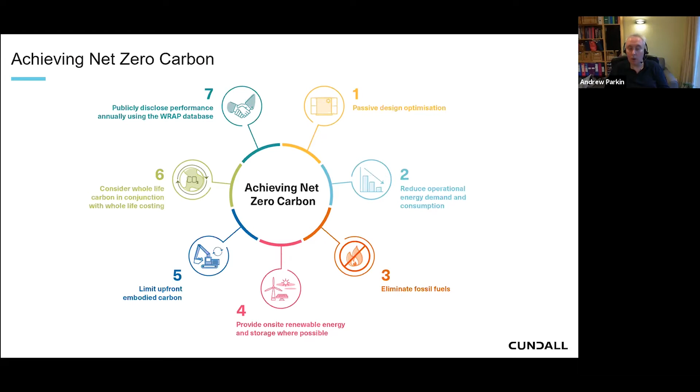This is something we feel very passionately about. We don't see there's any other choice - we have to aim for net zero carbon in everything that we do, and we're pleased that we can lead the way in that. We would urge you all to go the same way, and if you need any assistance in how you or your clients or your building stock can achieve net zero carbon, then please get in touch with us.

We're very proud of the work that we do. We win lots of awards for all different things, not just environmental, but for building design and everything. We're very proud of what we do, and we take a lot of opportunity to celebrate with our clients and staff the difference that we can make in the built environment.

We operate across a number of sectors and services, and the particular ones we're going to be dealing with today are air quality, acoustics and noise, and transportation. But all the other ones here come into play, and we work with our colleagues. The reason we're doing this seminar as a joined up approach is because that's how we do things.

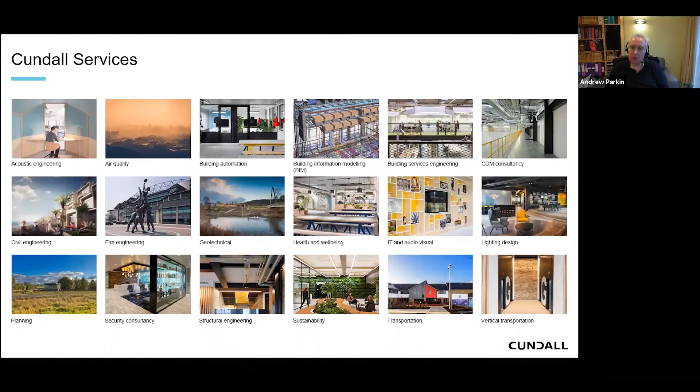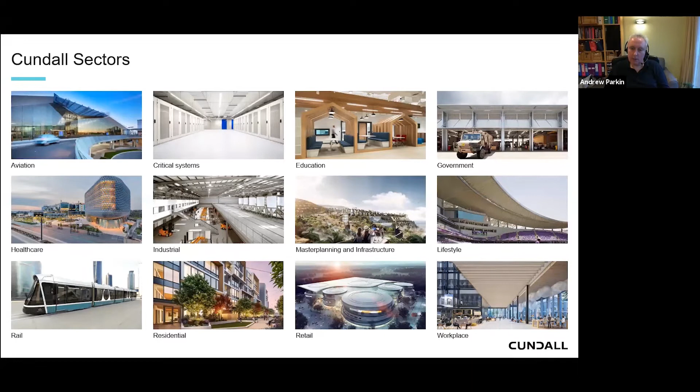Clean air zones are not just about air quality, they're not just about transportation - they're about everything. One of the key things is that there are consequences and knock-on effects for everything and everyone that we work with. Generally, clean air zones tend to be in city centres, and therefore most of these sectors will come into play.

So I'm going to hand you over to Jenny, who's going to talk to us about what clean air zones are. Jenny. Thank you, Andy.

Why clean air zones? It's well known that poor air quality has a significant effect on public health, both in the long term and the short term.

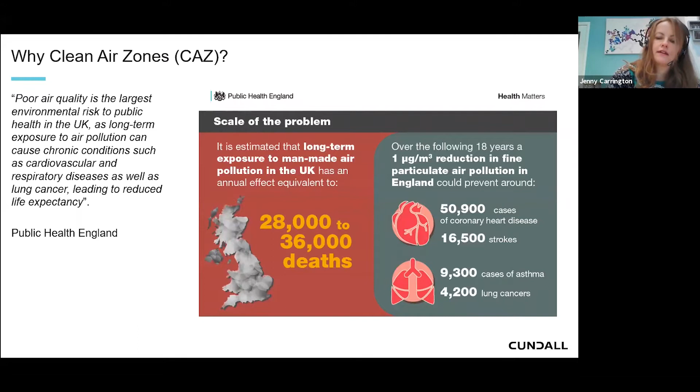So why clean air zones? Air pollution comes from a number of different sources. As well as transport emissions and road transport and non-transport, there's also industry, agriculture, residential and commercial small-scale combustion. But for road transport, DEFRA has estimated that about 80% of NOx emissions come from road transport, with the largest source being diesel light-duty vehicles and cars. So to enable compliance with the nitrogen dioxide objective, a clean air zone could be an appropriate way to go, based on the results of modelling for the UK's Air Quality Action Plan.

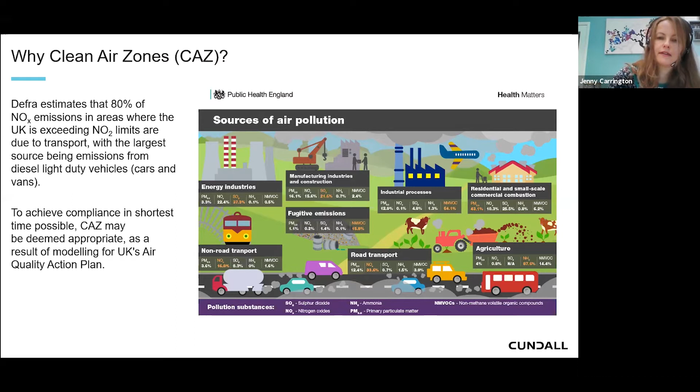So what is a clean air zone? It's an area where targeted action is taken to improve air quality by discouraging the most polluting vehicles from entering the zone, aiming to reduce air pollution associated with road transport, such as nitrogen dioxide and particulate matter. There are different types of clean air zone: non-charging clean air zones, which could be pedestrianised zones restricting vehicles, or allowing vehicles in but with a charging structure. There are 4 different classes, A, B, C and D, with each having an additional scale, D being all-encompassing. The cars included there would be Euro 6 diesel and Euro 4 petrol or lower. Another term for a charging clean air zone is a low emission zone.

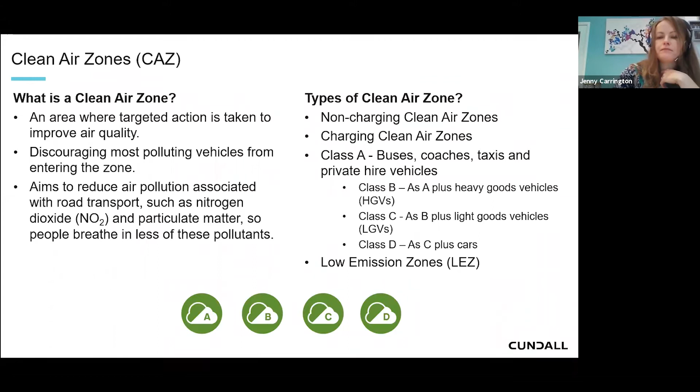So how are we getting on with clean air zone implementation? There has been somewhat of a delay with COVID, and some of the dates have been postponed or are still up in the air. York is proposed to be the first to go ahead in January next year, and it's going to be the first voluntary clean air zone in the country. This includes a request for funding for zero carbon vehicle delivery, including the use of rickshaws, which I think is a great additional level of innovation there. I know they've been in use in Edinburgh for quite a while.

The ultra low emission zone in London is due to expand sometime in 2021 to the north and south, and Birmingham, Bath and Greater Manchester already have confirmed dates, but the dates for Newcastle, Gateshead and Sheffield are still up for confirmation. There are other cities where a clean air zone is still to be considered further, based on feasibility studies to determine whether this clean air zone would actually be appropriate and deliver what is needed to enable compliance. I'll just caveat that some of this is ongoing investigation and discussion, so there may be an update on this list here, or something's missing.

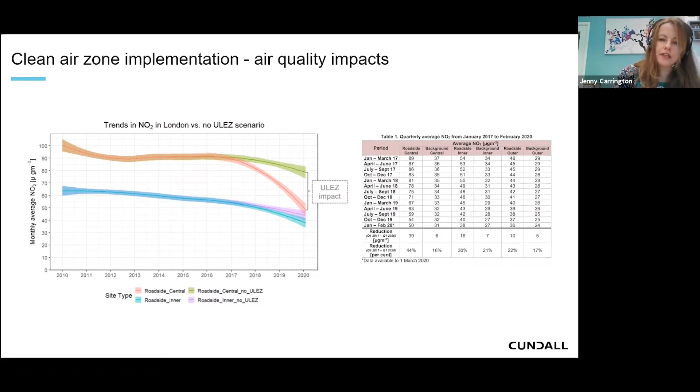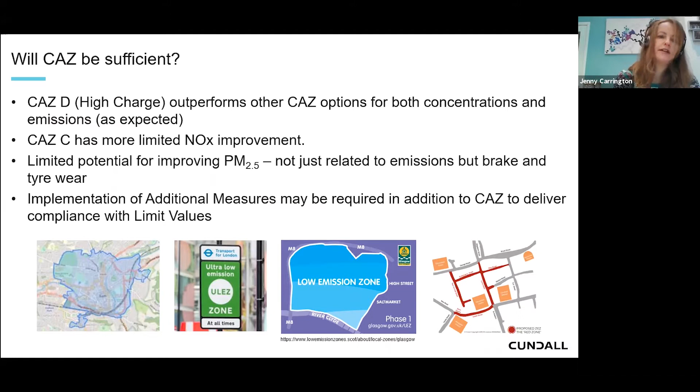So will the clean air zones be sufficient? Well, CAZ-D, the most encompassing with vehicles, outperforms the other CAZ options, which would be expected. CAZ-C has shown a more limited improvement. There is limited potential from improving PM2.5, as this is not just related to emissions from exhaust but also from brake and tyre wear. So it may be that the implementation of additional measures may be required to enable compliance with the limit values.

So what measures could be in addition to a clean air zone? Network interventions such as one-way schemes, banning of right turns, speed restrictions, and revising parking fees to discourage parking in city centres, and improvements to public transport and pricing, as well as improvements to the taxi and bus fleet.

There are some cities that have decided not to implement a clean air zone, including those that were originally first mandated, which were Derby, Nottingham and Leeds. The justification may be based on feasibility studies that demonstrate that additional measures would be sufficient to enable compliance. This might be the measures that have already been taken to improve the bus fleet in the city, as well as other transport-related measures.

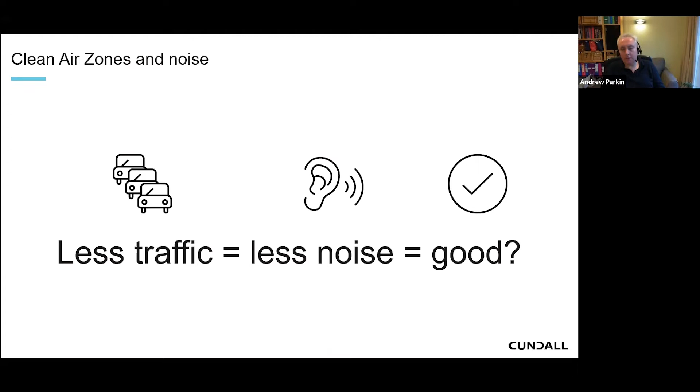So we've talked about things like NOx, nitrogen monoxide, nitrogen dioxide, PM 2.5, all the dust that comes off brake pads and diesel particulates. But what about noise? Well, surely if there's less traffic, then there's less noise, and that's a good thing. Surely. Well, yes, if that's as simple as it is, then that's the case. But let's just think about this a bit.

On the basis that the number of people stays the same, if people continue commuting and aren't traveling within the central zone, they're still traveling somewhere else. That's pretty logical, really. In London, people have avoided the central zone and just commuted to, say, the stations on the periphery and then travelled in. So if the number of cars and vehicles stays the same, it's just pushing the noise elsewhere. The city centres may get quieter, but the suburbs may get noisier, especially areas around trains and bus routes. So there are unintended consequences of that.

But there's no two ways about it: diesel and petrol cars are noisy. The reason they're noisy is because the engine gives off noise, the exhaust is a source of noise, and the tyres are a source of noise as well. So you've got those three key points of interaction.

But compare that with electric vehicles, because the idea is electric vehicles are quieter because they don't have noisy engines. Well, maybe, but they're not silent either, because they still whine, they have a motor. It's just a different type of noise. The thing that's no different between electric vehicles and petrol and diesel vehicles is the tyre interaction on the road. When it's dry, electric vehicles will be quieter, but when it's wet, there'll be absolutely no difference, because what you hear is the tyre noise in the rain. So that doesn't actually change.

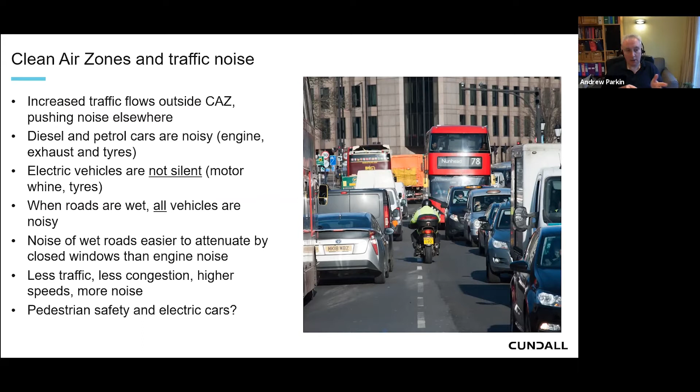With a diesel or petrol car, you will hear them coming if you're not paying attention. With an electric car, if it's driving at low speeds in dry weather, you may not hear it coming, and therefore pedestrian safety is something that needs to be looked at. That's led to a lot of car manufacturers looking at how they can synthesize noise to put back into cars, so you can hear them coming. It's a different science in itself, really.

One of the things we've talked about previously in our seminars is residential overheating, and I think it looks as though clean air zones should have a net positive impact on this, because if we're decreasing the amount of traffic in city centres, or having it moving faster, that should have a beneficial impact on how we control overheating in people's houses.

Generally, unless we have comfort cooling in apartments or houses, we rely on opening windows for air change. And the wider we open the windows, the more noise comes in. It's quite obvious, really. But also, we talked earlier about how trickle vents allow a lot of the high frequency hissing noise through, and it's the same principle: if you've got a small opening, you get a lot more high frequency noise.

So just by cracking the window open slightly, you will still get a lot of that high frequency noise coming in. But the overall noise level inside will get higher the more often and the wider you open the windows. So if we can make city centres quieter, alleviation of overheating will not have as much of a noise problem.

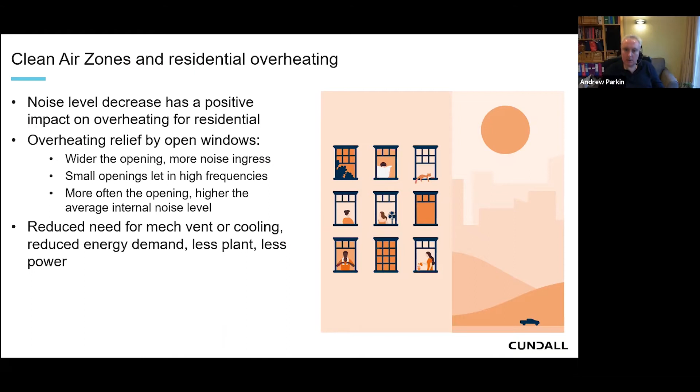So I'll pass you over to Glyn, who's going to talk about air quality.

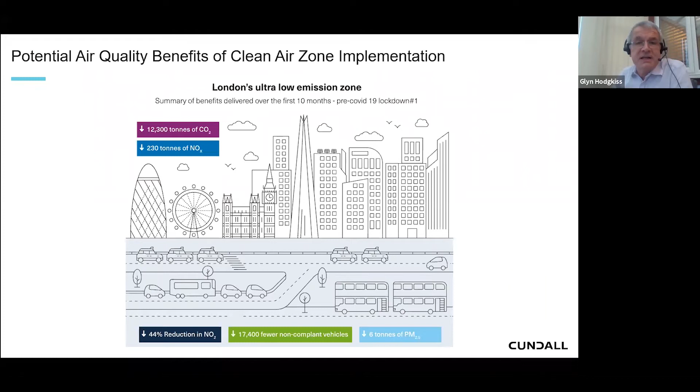So obviously a lot has changed since this data was collated. Expanding on some of the points that Jenny mentioned earlier, we've obviously seen only a 50% return in some modes of public transport, fueled by security concerns, social distancing, etc. But there's a concern that if we don't return to full pre-COVID levels of transport usage, this could have a detrimental impact on vehicle numbers on the road.

Obviously, many local businesses have been devastated. Personal finances have been devastated by job losses. This is all going to impact on people's ability to fund cleaner vehicles, even if they were in a position to do so. So this is going to decelerate uptake of low emission vehicles into the national fleet.

And then the final consideration is one of increased levels of home working. Obviously, this has helped to improve levels of traffic on the road. But if you think about the additional combustion of fossil fuels resulting from increased energy usage and home working, this could have a detrimental impact on background emissions.

So what I'm trying to say here is that all of these factors are important because they all feed into the thinking around the design of clean air zones. So the kind of things that you'd consider at the planning stage: spatial extent of the area, types of vehicles to target, timescales for implementation, etc. So it's important that we can scientifically examine all of these variables in producing a technical case to support the implementation of the clean air zone.

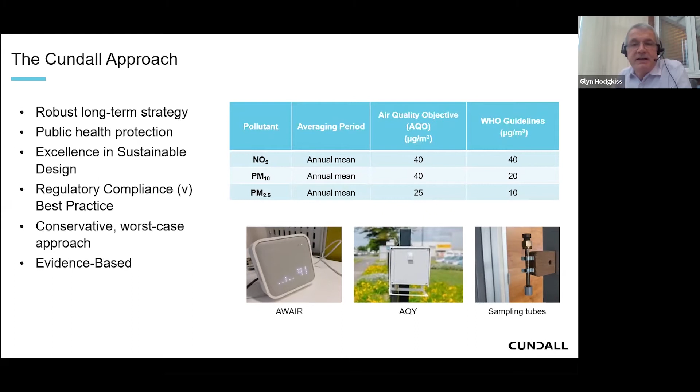Next slide, please, Andy. Okay, so this is a case study from a recent project we've been working on. It's a 1,200 apartment student residence in Selly Oak. It lies approximately 3.8 kilometres to the southwest of the proposed clean air zone boundary. So the development will not benefit from the maximum air quality improvements delivered by the CAZ. But nevertheless, modelling has predicted we could still see improvements of up to 0.8 micrograms per cubic metre NO2 in the Selly Oak area.

But as part of our assessment, we ignored all of these potential improvements. We assumed that the CAZ would not operate in future. We assumed there would be no improvement in background concentrations and vehicle emission rates, and we assumed that traffic would continue to grow at pre-COVID rates.

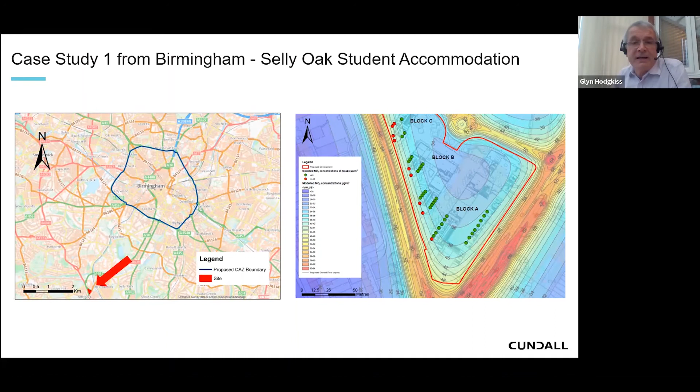So what we've managed to do on this occasion is negotiate a planning condition which will allow us to continue to monitor after planning approval while the building structure is constructed. And what we hope is that by demonstrating that our assumptions have been overly conservative, we can introduce further levels of natural ventilation into the building design, and all of this will obviously help to meet our net zero carbon aspirations.

Final slide, please, Andy. Okay, this is a second case study from the Claremont building in Newcastle-upon-Tyne. This is a grade 2 listed building refurbishment, looking to introduce greater levels of exhibition and recreational space on floors 1 and 2. The concern here was that the building is located just within the northern boundary of the proposed Newcastle and Gateshead clean air zone. And there was a concern that rat running around the edges of the clean air zone could be used as a strategy for avoiding charges, therefore pushing up traffic levels.

So what we were able to do on this occasion, we were able to bring in some nitrogen dioxide monitors into the building, monitor NO2 concentrations at the facades, and demonstrate typical average levels of 26 micrograms per cubic metre, well below the 40 microgram per cubic metre standard. And on this occasion, irrespective of whether the clean air zone is implemented or not, we'll certainly be able to run with a natural ventilation strategy going forward.

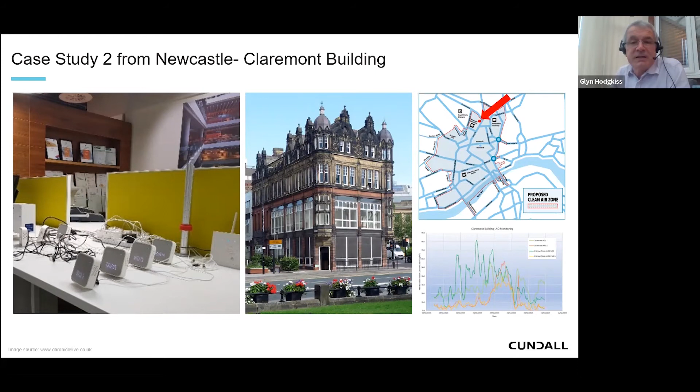So I'd like to pass you on to Neil now, who's going to be focusing a little bit more on some of the transport-related issues of clean air zones. Thank you.

Cheers, Glyn, and thanks everybody. As we've been listening throughout this, clean air zones are going to have a wide-ranging impact on the city centre and the urban environments. And throughout the whole of this, people mention the words traffic and transport. So for somebody who's in charge of a transportation team, I'm not going to say something controversial and say we shouldn't be talking about transportation any longer - we should be talking about movement. It's no longer all about transportation, and clean air zones will change our way of thinking into more of a movement-based design process rather than just transportation, because transportation tends to have the implications of traffic.

So contrary to what you said there, the implications for transport in urban areas - the title of the first slide - but if you think about movement for urban areas, as we know, the legislation environment's going to change. We're going to aid the achievement of objectives of the clean air zones. The internal combustion engine will be phased out by 2030, and that includes Euro classes, which currently some of the clean air zones can take Euro class 6 and 5s. That's going to have a massive implication to the design process for lots of reasons, which I'll come on to later on.

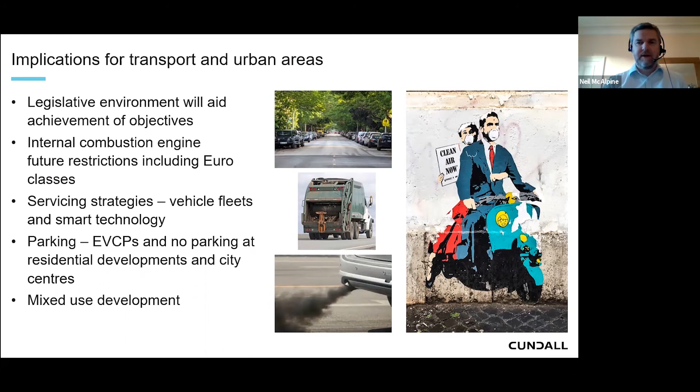It is as severe as that, and we need to be thinking about that in our design as we go forward. But also, mixed-use developments will become more prevalent. People don't need to travel as far in mixed-use developments. If you can live and work and play in the same place, you don't need to get into your vehicle to do that. So all these are immediate implications for transport.

Again, as Jenny said, they're not a panacea, and there's unintended consequences. Vehicle pollution is not simply tailpipe emissions. There's brake dust, there's tyre wear, but also for clean air zones, there's the buildings, etc. So clean air zones are not a panacea. Working on transport will not solve your problem alone. It is a large part of it, but you need to think of it holistically.

Access still needs to be maintained. We have a local economy, a nighttime economy, so access still needs to be maintained. So whilst again we're talking about vehicles, etc., and particularly reducing the amount of space required for these vehicles, we still need to make sure that local economies can be serviced, that people can park, that people can get to their house.

But more importantly, mobility impaired - lots of people forget about mobility impaired. They still need to have access, and we see all these designs coming in with flat surfaces, no curbs, etc., no tactiles. That needs to be thought about, because we cannot exclude those people. They need to be included in your designs. And again, I think as Glyn touched on there, social mobility.

Those people who tend to require movement outside of your traditional 9 to 5 tend to be in lower paid jobs, so your shift workers, your hospitality sector, etc. They probably will require a vehicle to get to their place of work, but actually not everybody can afford an electric vehicle. Not everybody can afford a Euro 6 vehicle.

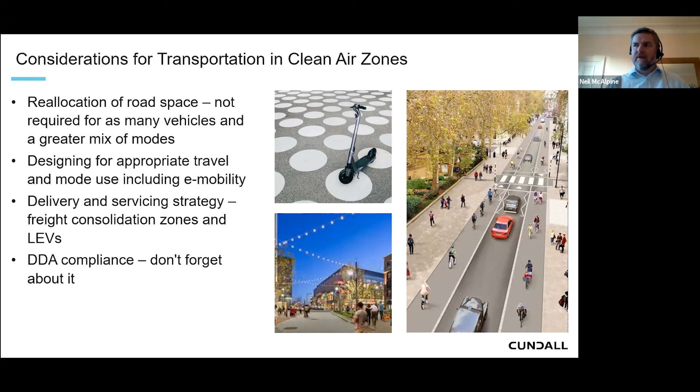So the way forward for designing clean air zones—it's not all about transport, it's not all about noise, it's not all about air quality. Yes, they may be the biggest impacts and the intended consequence, but we need joined up thinking, everybody in the urban environment.

One of the biggest bugbears of transport planners and people in my sector is greater interaction with land use planning. Andy Parkin mentioned earlier, you have a clean air zone, but then you create a shatter zone at the edge of it, where everybody drives, dumps their car, and puts in—poor people who live in those shatter zones. So we need to think more about how land use is used, not just where your development is, but what's the implication further away.

Be bold. Be willing to accept that the norm has changed. Don't just think, oh, it's a clean air zone, I'll stick a few electric vehicle charging points in, that'll do, I'll make sure the urban environment changes so it's better for electric vehicles, yeah that's fine. Be bold—change everything, change the way you're thinking, change the whole life cycle of your development.

Look to the future. That's part of being bold. Smart transport and smart movement is the future. People will not own cars as much in the future. Mobility will become a service.

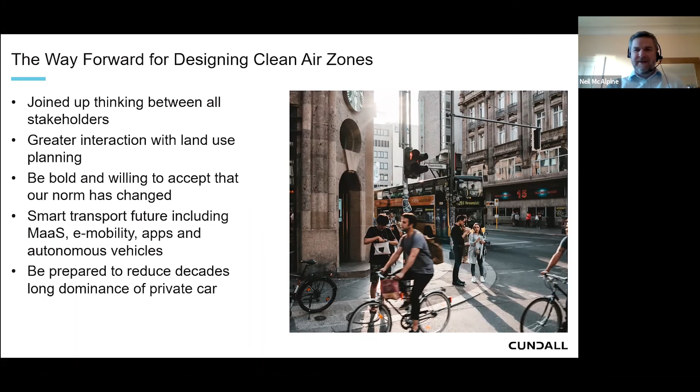Hopefully I've clawed back some time, and I'll pass back to Andy Parkin now for some closing thoughts. Okay, well, thanks everyone.

I think the overriding message from everything we've talked about is that this is a really complex issue. As soon as we start affecting one aspect of our urban environments, there are ripple effects that everything else has to look at. As Neil says, we can't deal with any of these in isolation. It has to be a joined up approach. Otherwise, we end up with a real Frankenstein's monster of a design.

So get the designers involved early, look at things holistically and sustainably, and we'll get the right solutions. So just some takeaways from what we've talked about.

We need to carry on monitoring. We can make predictions, look further down the line and think we know how things might be, but let's constantly reevaluate that. Measure air quality, measure noise, and readjust our strategies as needed.

Generally, the noise implications of clean air zones should be net positive. But there will be knock-on implications. I think Neil called them shatter zones, those that bear the brunt when the traffic goes somewhere else instead. But generally, when the transport stock decarbonises, the overall noise should reduce.

But as long as it's not raining, and it never rains in the UK, so that's fine.

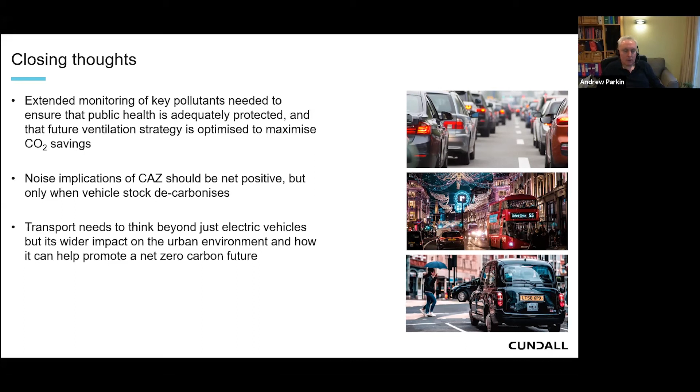So the move to electric and non-internal combustion engine fueled road vehicles will inevitably result in huge financial loss to the Treasury in fuel duty and VED. Is it likely that a pay-per-mile for all vehicles, or a similar road use charge scheme, may be introduced to compensate for this financial loss, rather than the current polluter pays system?

I'll go first, and then I'll pass over to somebody else. Trust me, the Treasury will not lose out. The Treasury will find a way to get your money back, and already we're seeing it with VED - it's an extra £400 per year for 4 years if your vehicle's over £40,000. Most electric vehicles fall into that category, so they will find ways of doing it. But back to road charging and road pricing - that argument's been around for years, and the economics of it have never seemed to stack up. Because what you're essentially trying to do is make people mode shift, and as soon as road pricing becomes effective and they mode shift, you've lost your revenue stream. So then what do you do? Do you start taxing public transport? So I suspect VED will move away from the emissions-based model and essentially go to a price-based model - you'll be hit with a larger tax when you buy your vehicle, and then for the next 3 or 4 years after that, you'll be hit by a larger tax and implications. I'm sure somebody else might want to add to that.